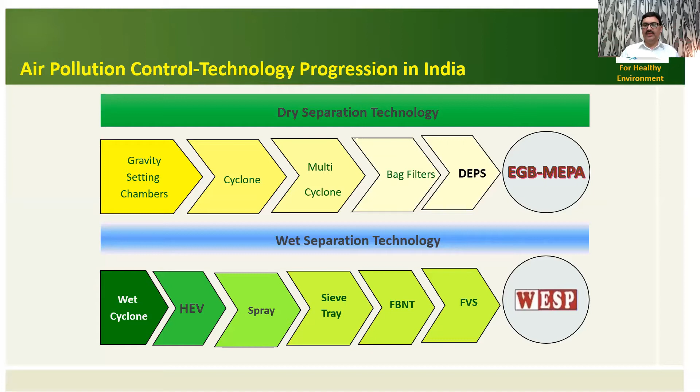So these two relatively new technologies for the Indian market are EGB, MEPA, and the wet ESP. Today we will be discussing EGB, and in our next webinar we would be taking up the wet ESP on 1st of May. We will separately discuss and talk to you about that.

Friends, having come to know about the technology progression of air pollution control in India, you know the technologies used at the moment at most places are either wet scrubber, ESP, or bag filters. But when it comes to difficult characteristics of ash, the typical nature of dust particulates, these technologies have certain concerns.

Those characteristics are shown on the right hand side of the screen. These concerns become more heavy when it is very ultra fine particles with light density. When I say ultra fine, I mean below 10 microns or even below 5 microns. So when the majority of particles are below 10 or 5 microns, existing technology has some concerns.

When the particles become sticky in nature, due to certain fuel characteristics, these prevailing technologies face certain threats. On top of it, if it is corrosive, it is a threat for wet systems and wet technology. And if it is hygroscopic in nature, it is again a big threat for all prevailing technologies like ESP or bag filter, because it captures moisture from the atmosphere very fast and becomes more sticky over a period of time.

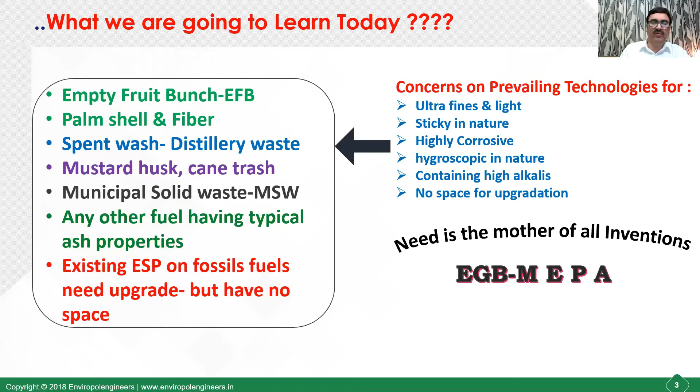We will learn how the EGB works, and will take up a case study from one of the most reputed sugar industry factories in India.

So if we come back to the spent wash scenario, you might be knowing that it has very difficult ash properties. If you look at the ash analysis here, you see that potassium and sodium salts, which are the alkalis, are more than 45% or about 46% concentration. And if you look at the particle size distribution of the ash in this graphical representation, you find that about 40% particles are below 10 microns.

Below 1 micron is a sizable quantity in terms of volume. So the ash properties are difficult. Ash composition is difficult. The sizing is also very, very fine. It has a hygroscopic nature.

Besides this, if you see the quantity on such incineration boilers, the input dust concentration is as high as 30 to 40 grams per normal meter cube, whereas the desired outlet emissions are 50 or below 50 milligrams per nm cube. So here is a case where we have all sorts of difficulties.

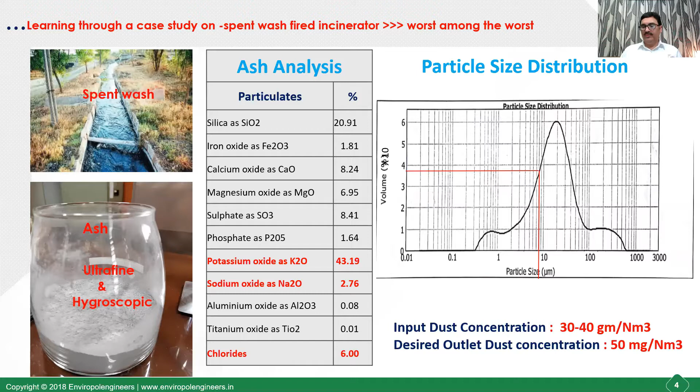So before I take up the actual case study on this particular application, let me tell you what are the different concerns on the prevailing technologies for such kind of fuels.

These are the prevailing technologies which we have discussed, like bag filter, ESP, wet scrubber, and wet ESP.

Friends, if you look at the existing technologies applying on this particular fuel, or on such nature of ash characteristics, be it palm shell, EFB, or any other, then we find that the bag filter in the present technology is suffering from certain threats, like restricted operating range of temperature in the flue gas.

As you know, these fuels are very, very sticky in nature, so a lot of fouling takes place on the pressure parts of the boiler, which increases the exit temperature of the flue gases. Sometimes it goes beyond control, and the boiler has to be shut down for cleaning.

So having a bag filter on such a scenario, because bags are designed for a certain maximum temperature, and here the minimum temperature is also restricted because of the sticky and corrosive nature of the dust and the presence of sulfur, there is a very restricted band on which these bag filters can operate, and this band is about 180 to 220 degrees C.

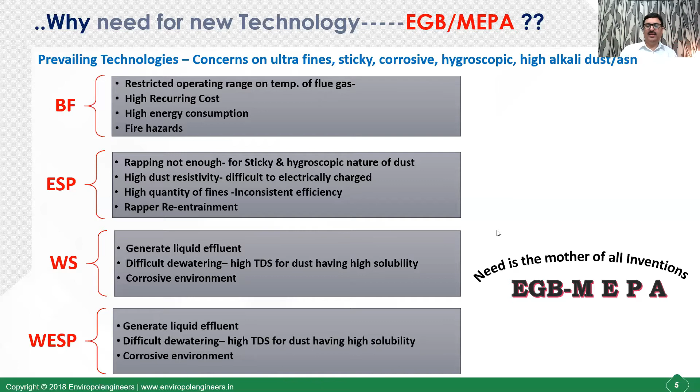Yes, thank you. Thank you for the response. I think we all understand how it goes. So I'll just repeat for the sake of remembering these aspects before we move to the next phase of this presentation.

The limitations are there whenever we have ultra-fine and light dust, whenever we have sticky dust, whenever we have highly corrosive dust, whenever we have hygroscopic dust, whenever we have dust containing high alkalis, or whenever we have very limited space for the system to be deployed or upgraded. With the kind of non-conventional energy sources the government is pushing for to save on fossil fuel, all these natures of dust are going to come - and it's already coming - and people are fighting to resolve these emission issues.

So what is the solution? We have been working on this for the last couple of years, almost 7 years now. The team at Enviropol was pushing to resolve these issues whenever such nature of dust comes from the system. Particularly on spent wash fired applications, our emphasis was how to get rid of the concerns that bag filters and ESPs pose in the industry. This led us to a solution with the help of a US-based company, a US-based innovator, a PhD graduate from MIT. In the 70s and 80s, there was research done on this gravel bed precipitator.

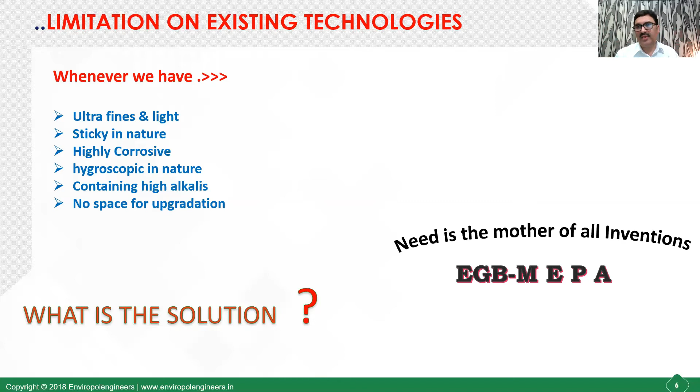So I would be taking you to a case study on this particular installation. You can see in the photograph, it is an installation from Daurala Sugar Works on a spent wash fired application. As you know, Daurala is one of the known factories in the sugar industry in India and abroad. They feel pride in taking the first step in the industry.

They have tried, tested and successfully commissioned so many new technologies, and have always been the flag bearer to the industry. Be it the sieve tray scrubber in 1990, or the bagasse dryer, or a wet ESP in the sugar industry, first installation again in the world, or this EGB, which is also first in the world on this particular application.

So I thank you, Daurala Sugar Works, from the bottom of my heart, for giving this opportunity and giving this ray of hope to the industry to resolve this problem. Thank you very much, Daurala Sugar Works.

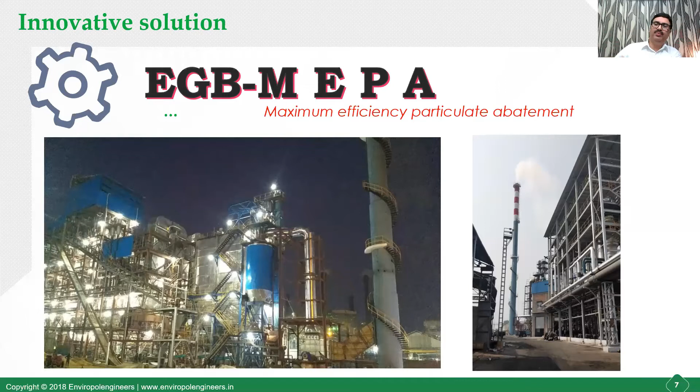So we start with the EGB or the MEPA. I'll tell you what is MEPA and what is EGB as we proceed. EGB, as I explained to you, is an electrified gravel bed precipitator. It is a dry system which is again electrostatic precipitation. So you can think that it is an ESP of a different kind. But what is MEPA?

MEPA is nothing but a hybrid EGB, which is the combination of a dry ESP, maybe a smaller dry ESP as a pre-dust collector, followed by EGB. The combination is called MEPA, Maximum Efficiency Particulate Abatement System. So my friends, having a DESP before EGB is basically to work as pre-dust collection, and whatever is left out from the ESP can be handled by the EGB, and this combination has worked nicely.

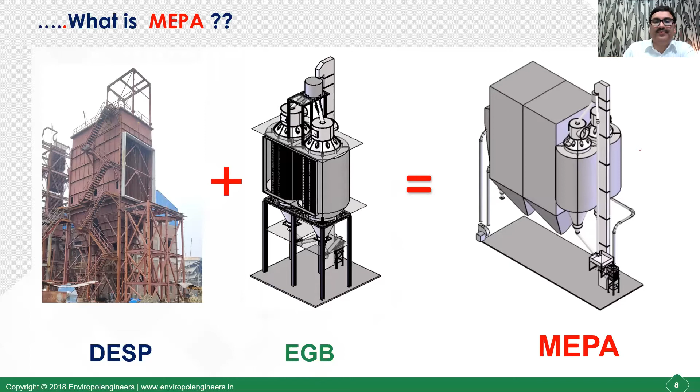So let me take you to the case study from Daurala Sugar Works on this fuel. First, I'll tell you how the whole concept was conceived, and then we will go into the EGB technology in more detail, because EGB has a lot of other applications as well. It is not limited to only MEPA. It can be used as standalone equipment in many other applications having a very difficult nature of dust.

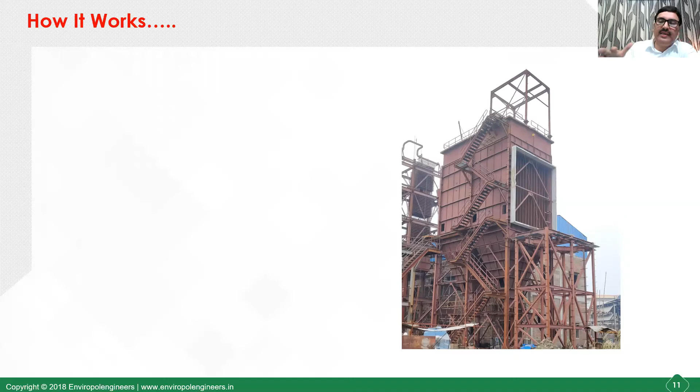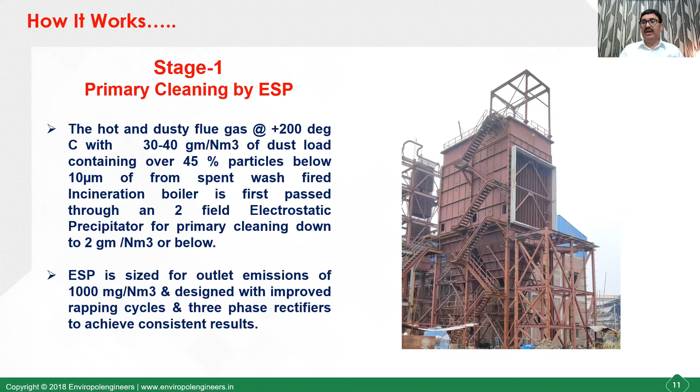So in case of MEPA, the input dust concentration from this spent wash fired application is 30 to 40 grams of dust per normal meter cube, and 40 to 45% of particles are below 10 microns. We have used a two-field ESP to bring down the dust level from 30 to 40 grams to about 1000 or 2000 milligrams per Nm3 in the ESP itself. And most of the fines left out by the ESP, below 5 or 10 microns, pass through an attached EGB as a secondary cleaning or polishing filter.

So the already charged particles from the ESP enter the EGB, where they are captured in the polarized gravel bed, because the particles are already negatively charged in the ESP, and they come in contact with the moving electrified gravel bed. Particles even below 10 micron, even below 2.5 micron, get captured, and you have much more consistent efficiency compared to standalone systems, and much better quality of flue gas coming out.

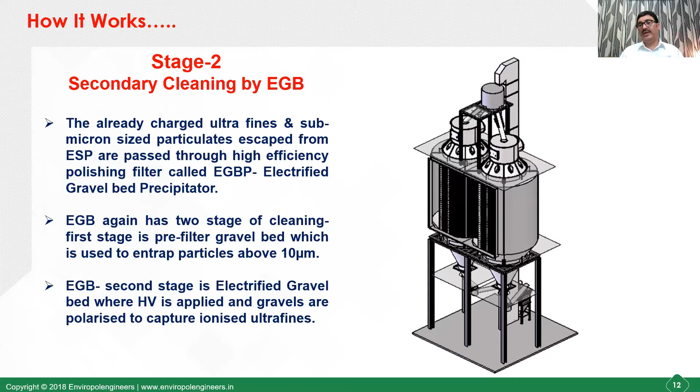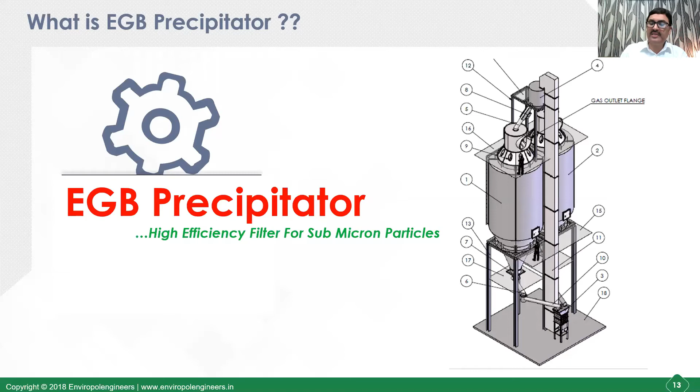We all know about ESP, so we are not discussing conventional ESPs, though the ESPs on this application have certain innovations and are no longer absolutely normal ESPs because of the sticky nature and other complications in the dust quality. So let me discuss the polishing filter EGB in particular in this presentation. What is EGB and how does it work?

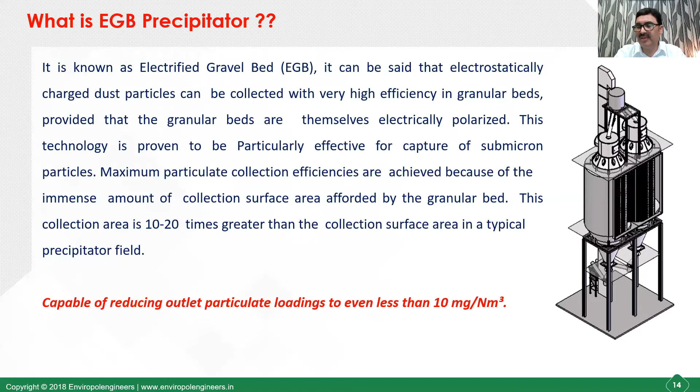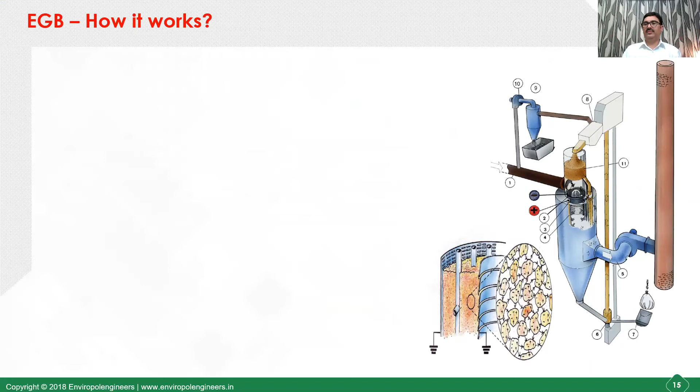So how does it work? I'll just explain how it works. If you look at the diagram, you can see there is a cylindrical vessel. And let me tell you, this system can be designed with top entry or bottom entry. Both ways are possible, and the diagram shows top entry at the moment. The gas is coming and passing through an inner cylinder and the outer cylinder. This is the outer cylinder, which has got a gravel bed, and this gravel bed is embedded with discharge electrodes.

And these discharge electrodes are connected with a TR set, similar to ESP, but the kVs are different. Here 10 to 20 kV is good enough for polarizing this gravel bed. As the gravel bed receives the high voltage, it gets polarized. One side of the surface gets positive charge and the other side gets negative charge. So the gas passes through the inner cylinder, then takes a path through this electrostatically polarized gravel bed, comes out and goes to the chimney.

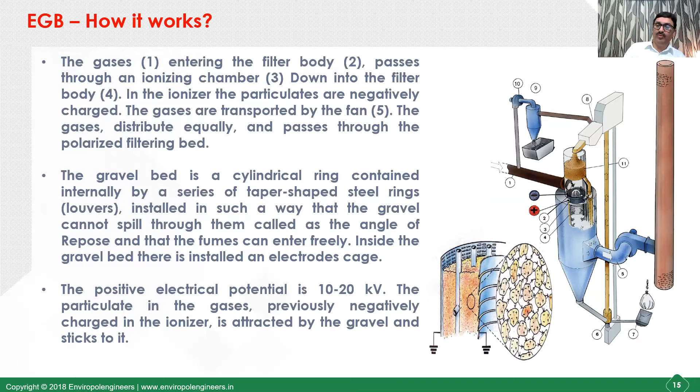So as I explained to you, if you can see the inside view of this, the gas is coming and then passing through this gravel bed. These are the emitting electrodes which are connected with the TR set. This is the ionizer, and the rest of the equipment I've already explained to you. This is a gravel cleaner followed by a bucket elevator and then a gravel distributor, cyclonic separator, and this is your gravel cleaner. Okay.

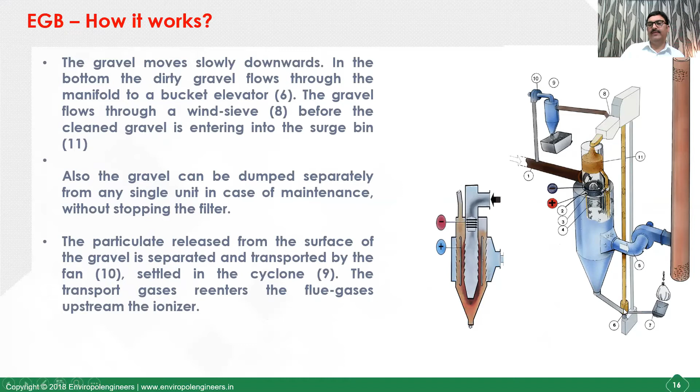So what are the advantages of EGB as a whole? If you use it as a polishing filter in the downstream of any other conventional APC system, then the first advantage, as I explained to you, is the large collecting surface, which is 10 to 20 times more than the ESP.

The gas distribution is even because you have a pressure drop of 60 to 100 mm of water column designed across the bed. It depends on the efficiency requirement, but we have across the bed 60 to 100 on design conditions. Okay, so when the pressure drop is there, the gas distribution issue is not there. You can have evenly distributed gas across the periphery of the filter.

Low power consumption. As I explained to you, there is no current flowing from the gravel. Gravel is not a conductor of electricity. It is just polarized plus and minus side. When there is no current flowing, there is no power. So the power consumption is zero as far as the main unit is concerned.

Whatever is written here, 10 watt per 1000 meter cube per hour of gases, is exclusively on the auxiliaries like your feeder or bucket elevator and all. But the main electrostatic unit is not having any power consumption. It is only voltage. There is no current flowing. Current is almost zero. It shows zero on the screen when everything is going smooth, unless there is some moisture creeping in. Okay.

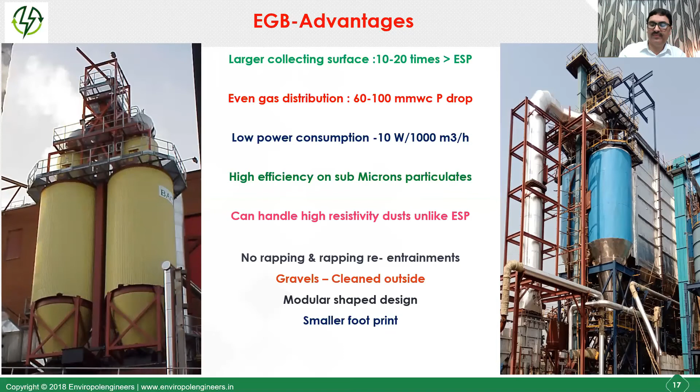So these are the advantages which are very prominent. We found that if the technology can get a good opening, if it can be applied nicely in a variety of applications, it can do wonders in the industry to collect very fine particulates which are a respiratory threat for people. So the major USPs are compact sizing, capable of handling high resistivity dust, no maintenance-prone rapping system, capable of reducing particulates below 10 micron. These are the highlights of this EGB summarized.

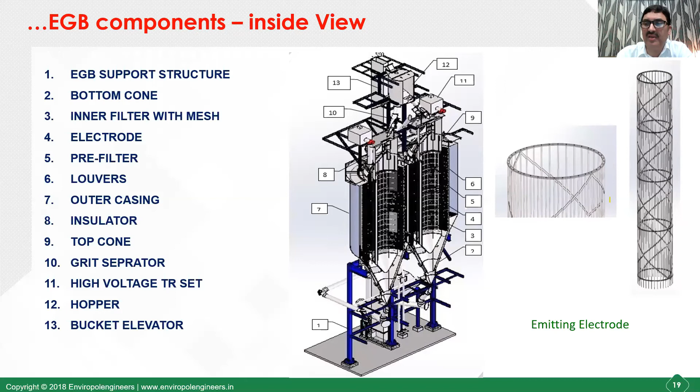What you see on the right most is the discharge electrode cage. It does not have a single electrode across the periphery; it is a complete cage acting as an electrode for polarizing the gravel bed. Since it is made from thick pipes and rods, it has got a very good life. The feedback from other countries is that it has a life of about 15 to 17 years. The installation was done in 2003, and they replaced this in 2017. So it has a good life, unlike a normal ESP where these electrodes are very delicate to operate.

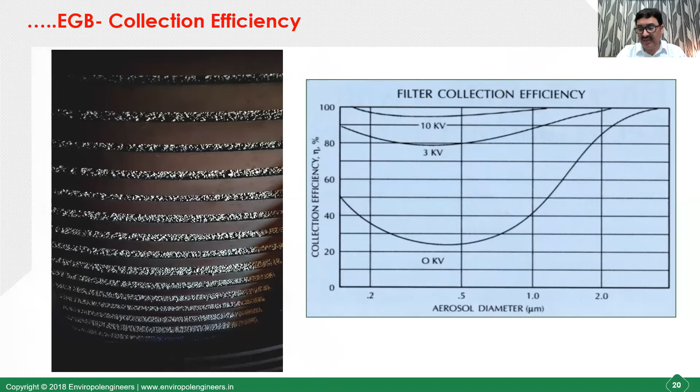So when it comes to the very fine particulates, PM 2.5 or below, this equipment can find a very good space and create its own advantage for any application wherever it can be applied.

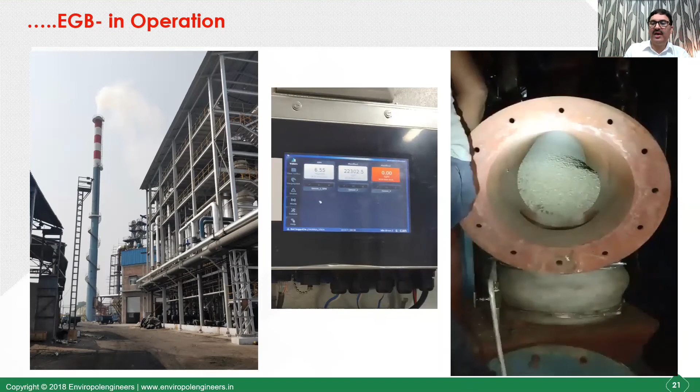Now I'll show you a video of how the dust soaked or dust laden gravels are coming out from the system for cleaning and going to the gravel cleaner. So on the right hand side, you can see this. These are the gravels soaked with highly alkaline ash, which has a lot of potassium content, coming out whitish in color. And these gravels are taken to a gravel cleaner,

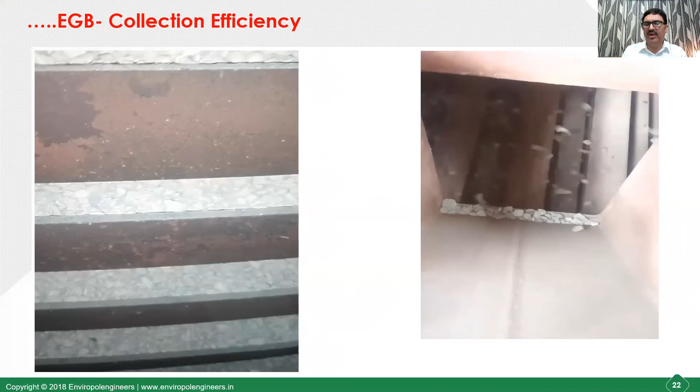and on the right hand side you have this gravel cleaner. You can see these gravels are getting cleaned with the air pressure, and then air is sucked, which is a very small quantity of air. It is sucked, and then the dense air and solid ash mixture is separated through a cyclone or a bag filter, depending on the application. It's a very small cyclone having a dia of about 800 to 1 meter for this application. Okay, and then you can see the cleaned gravel coming out from that.

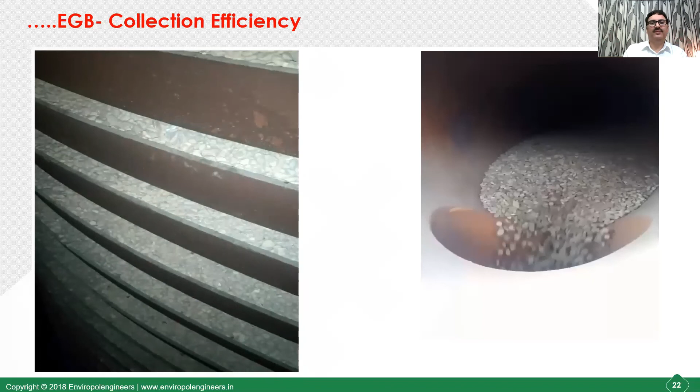If you look at the screen, you can see that the current in the TR set is almost 0 here. And delta P at that point of time was around 100 mm across EGB. This being the first installation, there is a good amount of learning. We have done a lot of learning in the installation, and every new installation is going to have something added for an improvement in future.

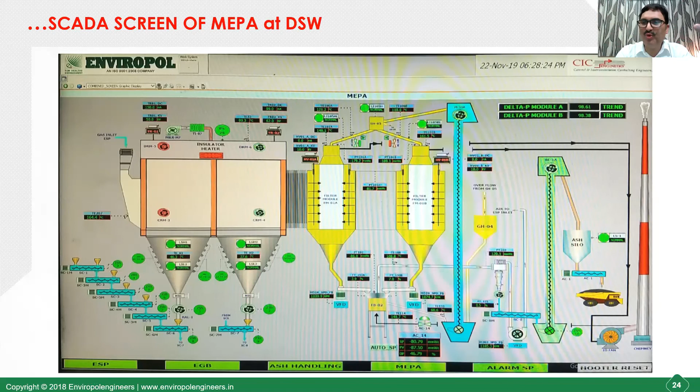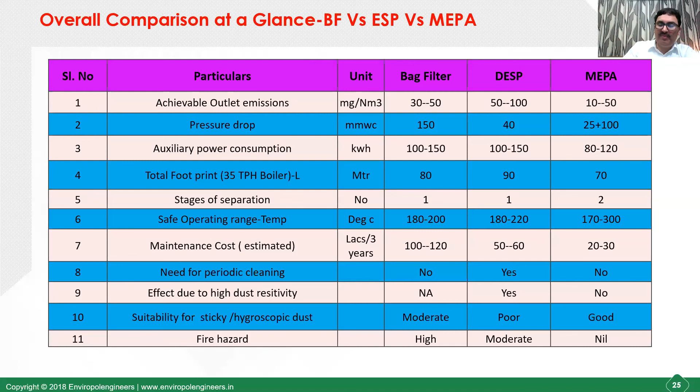Friends, having seen this presentation for a particular application, I tell you that this is the most difficult application. The other applications which I told you about in the beginning are simpler than this, because this one has got all sorts of negative elements as far as pollution control is concerned.

The others are going to be much simpler. These EGBs are running even on coal-fired boilers in the industry across the globe. It runs on other applications such as wood, palm fiber, and even EFB can be a very good use. Besides this, we've discussed with our collaborators the black liquor fired application in the paper industry, which is again a very difficult fuel, a liquid effluent, and hard to control on emissions. So there it can work as a MEPA on black liquor in the paper industry.

So for industries or plants having an ESP already, but the ESPs are not meeting the current norms of the Pollution Control Board, besides they do not have space to upgrade the ESP to extend the field. I've seen many industries try even adding a field, but after a certain amount, fines still escape. Even on this spent wash, people have tried adding two more fields after the fourth field, meaning fifth and sixth, but still emission levels have not come down to the desired level.

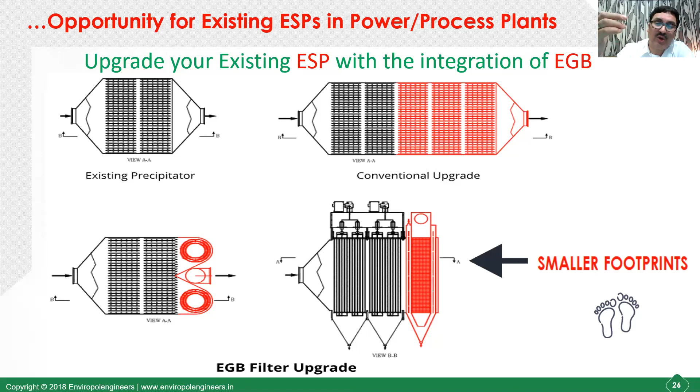But on a conventional boiler, even if adding a field is a solution for conventional fossil fuels like coal and lignite, and if people don't have space to do that, then this EGB can be fitted within a very limited space. In some installations, even the space of the outlet funnel, as you can see in the layout, can accommodate the EGB. So there may not be any requirement for additional space, and this becomes a very favorable option for industry to upgrade existing ESPs, besides being an option for difficult fuels as I explained.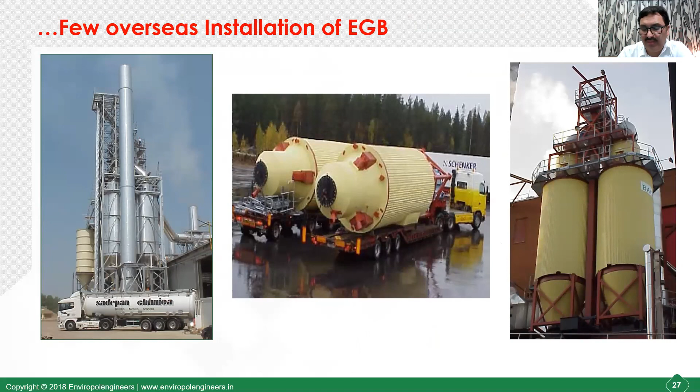So in conclusion, we are reaching the end of the presentation. Before we start the question and answer session, let me summarize what we have learned since the first slide. We first discussed the difficult areas or concern areas of the industry regarding emission control. Then we discussed the problems in existing or prevailing technologies for those difficult situations. Then we realized we need something new to address this concern, and discussed the electrified gravel bed precipitator.

In addition, we also discussed MEPA, and compared how those difficult situations can be met with this technology. We made a gap analysis as well, like difficult sticky nature, no problem here because the gravels come out for cleaning. Resistivity, no problem here because there is no migration and current flowing. So under the advantages slide, we mapped all those concerns and how they are addressed in this particular technology.